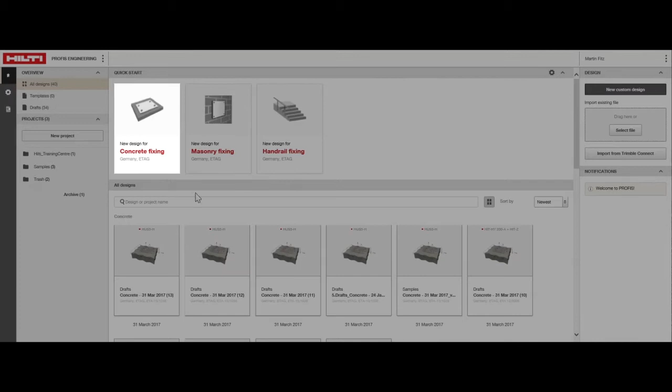First, navigate to the Concrete Design module from the Setup screen. To get started, select whether your base material is cracked or uncracked concrete. The default selection is cracked. Uncheck this only if the concrete will remain uncracked throughout its life cycle and supporting calculations can be provided showing concrete will always remain under compression. For this example, we've selected cracked concrete.

Now we must choose the concrete grade from the drop-down box. C20/25 to C50/60 are covered by standard anchor approvals. Low-strength concrete is allowed for selected anchors and is designed according to the Hilti SOFA method. For this design, we'll select C25/30. Let's move on to reinforcement.

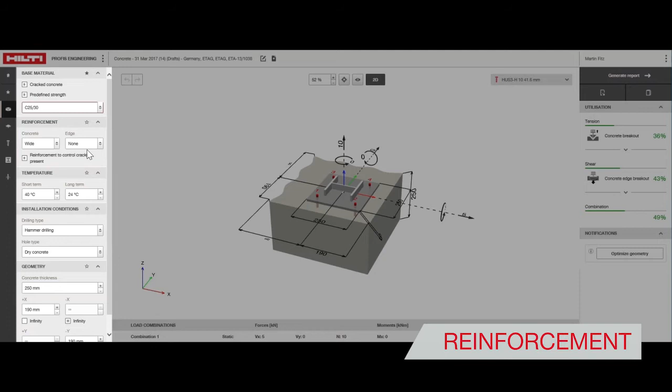Choose None when reinforcement is completely absent. Choose Wide when rebar spacing is greater or equal to 150 mm regardless of bar diameter. You should also choose Wide if rebar spacing is more than 100 mm with a rebar diameter smaller than 10 mm. Dense should be selected for all other cases, including if the degree of reinforcement is unknown. Highly reinforced concrete members actually have a positive impact on anchors with shallow embedment depths. For this example, we'll select Wide.

Edge reinforcement works in the opposite way, in that the resistance increases with an increasing degree of reinforcement. Choose None when reinforcement is completely absent. This is the most conservative option. Closely spaced stirrups act as hanger bars. The effect of each of these settings differs from guideline to guideline. For this design, we'll select None.

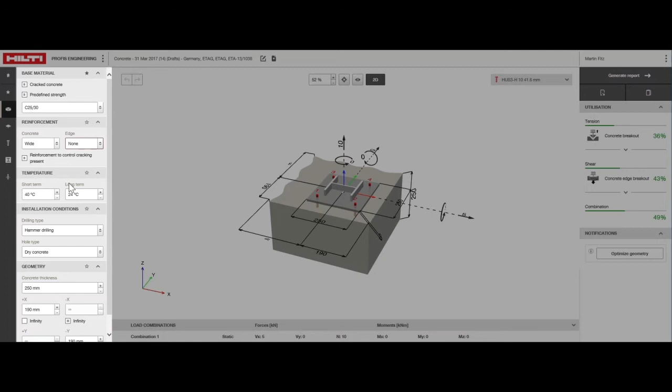Concrete temperature affects the design performance of chemical anchors. Enter the maximum mean value over a typical day-night cycle in a number of weeks or months. The drilling method and the condition of the hole while installing the anchor are defined under installation conditions. This influences the anchors available for selection as well as their load capacity.

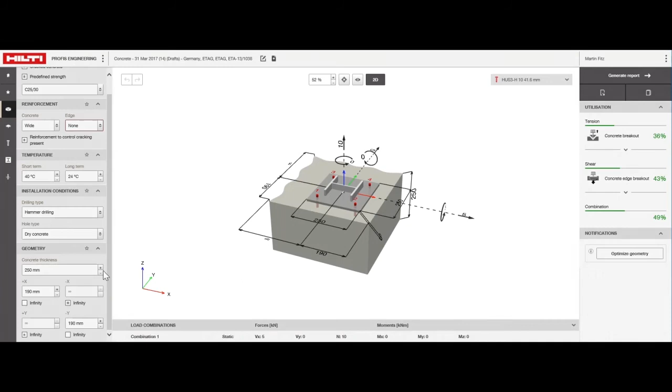To position the profile on the concrete, values can be entered in the 3D model or in the Menu tab. First, we must set the thickness of the concrete member. This limits the depth to which the anchor can be set. We'll set the concrete thickness to 200 mm.

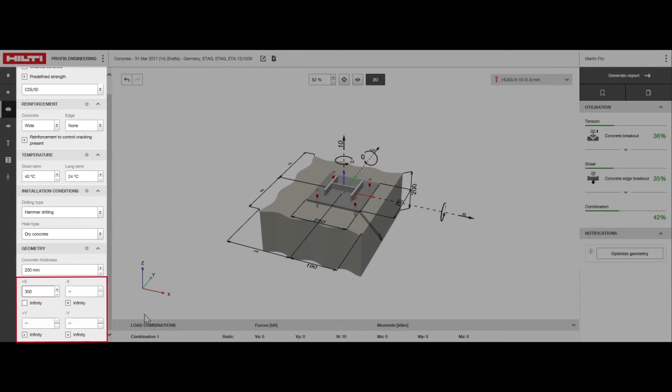Next, set the position of the steel profile with respect to the concrete edges. This affects the amount of concrete activated for tension or shear loading. Here's where you can set the edge distance. We've set the distance between the center of the profile to the concrete edge at 300 mm.

Now it's time to choose the type of load: static, seismic, fatigue, or fire. For this design case, we'll apply a static load with a compression load of 10 kilonewtons, a shear force towards the edge of 15 kilonewtons, and a bending moment about the y-axis of 10 kilonewton meters.

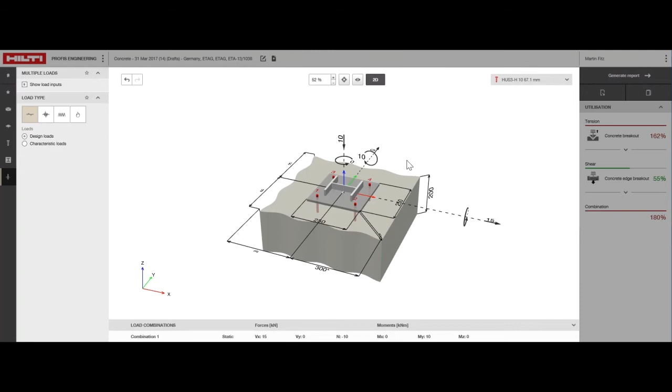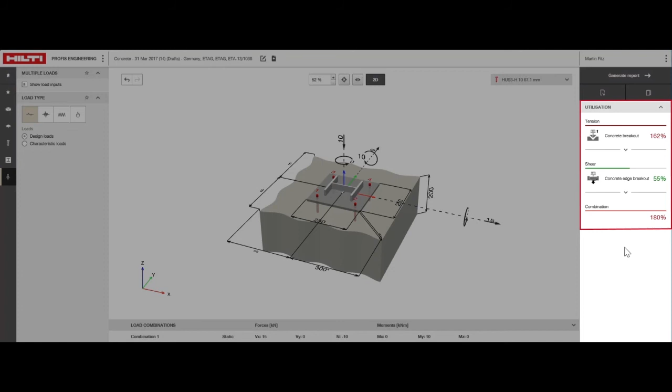A valid solution should have the anchor utilization ratio less than or equal to 100%. If we look to the right, we see a utilization of 180%, which means adjustments are needed. There are ways we can fix this. We could change the anchor, keeping the base plate dimensions and anchor spacings fixed, or we could keep the anchor fixed and adjust the base plate dimensions, anchor spacings, and number of anchors. Let's try the first approach.

In the anchor selection window, we can go through each family type and size until we get a utilization of less than or equal to 100%. Or to speed things up, we can calculate all anchors that can be used with the same design inputs. In the filter settings to the left, we can show only those anchors which work. The first thing you may notice is that the utilization is 100% for all anchors. That's happening because the optimized embedment depth option was pre-selected.

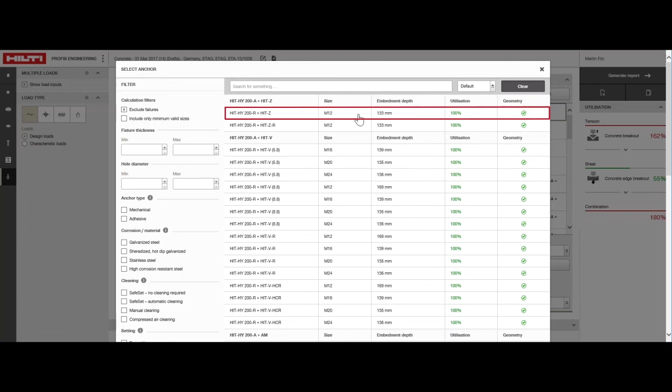Here we see that HIT-HY 200 adhesive with a HIT-Z M12 rod at an embedment depth of 135 mm provides a solution. By clicking on the anchor, we select it for this design and return to the main window. At the bottom of the anchor selection window, we now adjust the embedment depth to 140 mm by switching to User Selected Embedment Depth and entering 140 mm manually.

Now you have the information you need to jump in and start designing anchor fixings in concrete quickly and accurately.